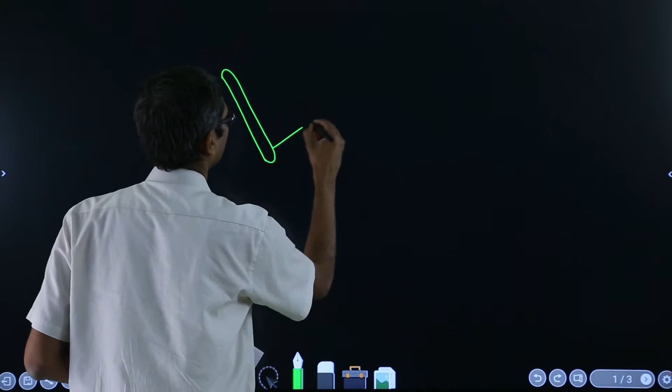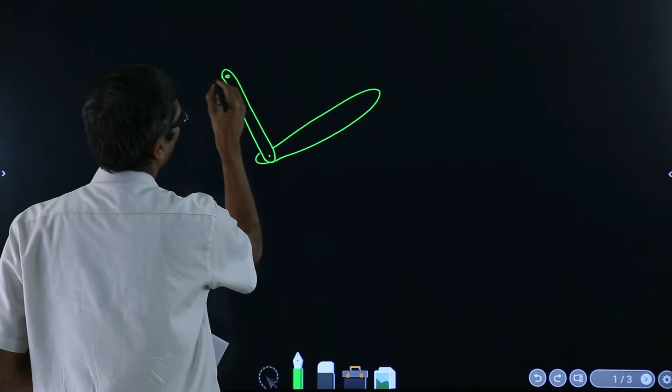Just for an example, a very simple one, suppose I draw something like this. Suppose we connect two bars like that, okay. Or let me draw this. And now suppose at this point here, I will simply put it here, no props, I'll stop it here.

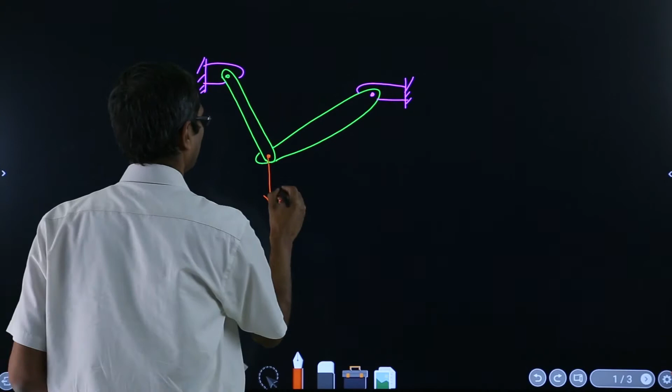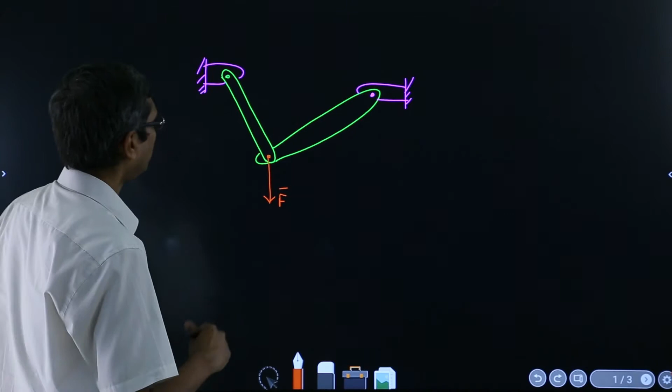And now I am applying some forces, say here. Right, now this is a simple, perhaps the simplest possible system where two bodies are connected. Now whether there are two bodies or three bodies is actually a point of discussion, and then we will proceed further. Here, this is body 1, this is body 2, but then what about these two?

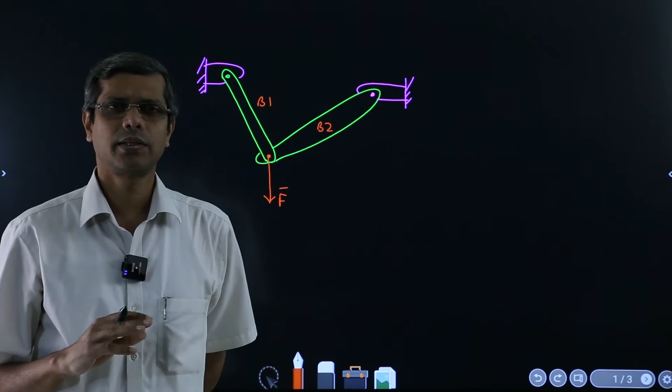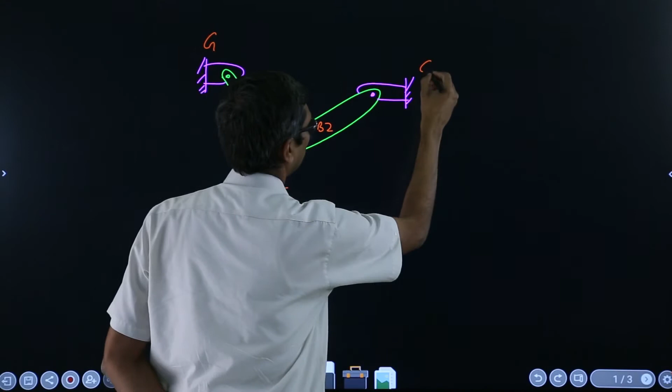Now the way I have drawn it, I have made both of them belong to the ground. So we can just say it's ground G, and this is also ground G. Now if we consider ground also to be one of the bodies, then there are three bodies in all, and if we don't consider ground to be a body, it's up to you how you try to write the further equations.

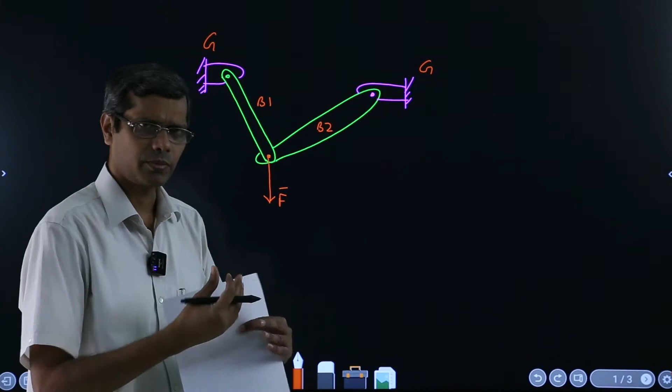Generally it is not necessary to consider the ground to be a body, but if you don't, then there are two bodies connected with each other by a pin joint, which is flexible, and these two green bodies are free to rotate about this point of connection. But then as a whole, the body cannot actually move.

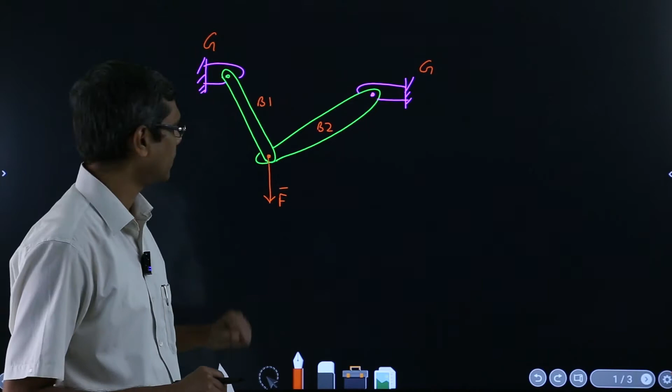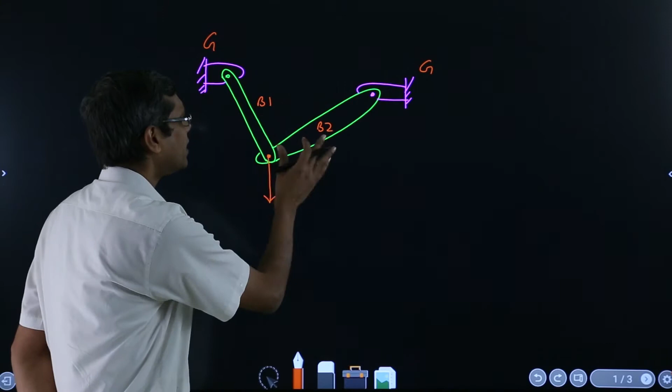In a way, the thing is, if I remove this joint, definitely they cannot move, because this point is fixed here. So this triangular section is behaving like a rigid one, and there will be no relative motion between this bar and this bar.

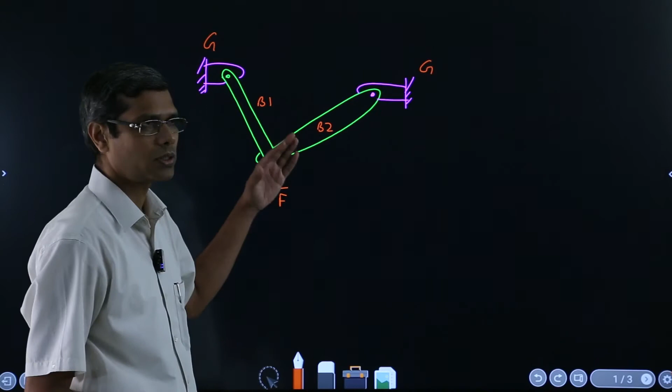Under such conditions, precisely these types of situations are what our discussion will happen around. That means they behave like a structure.

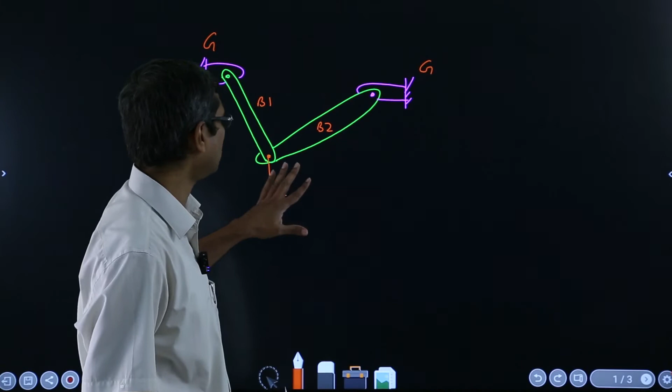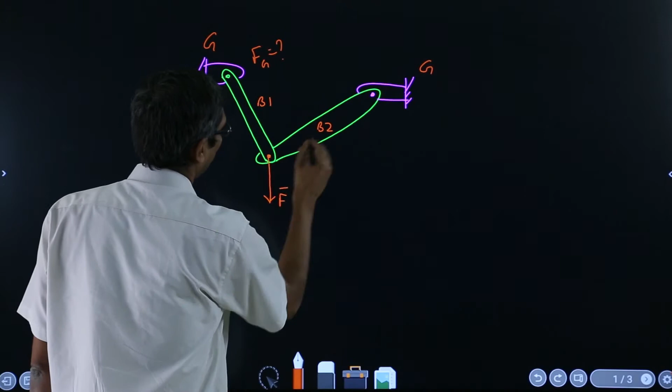Now when such things happen, our job will be to investigate what force is acting at this joint, the force on the ground maybe. Similarly, what force is coming on B2. So these are the types of questions we try to answer in this equilibrium of connected body forces.

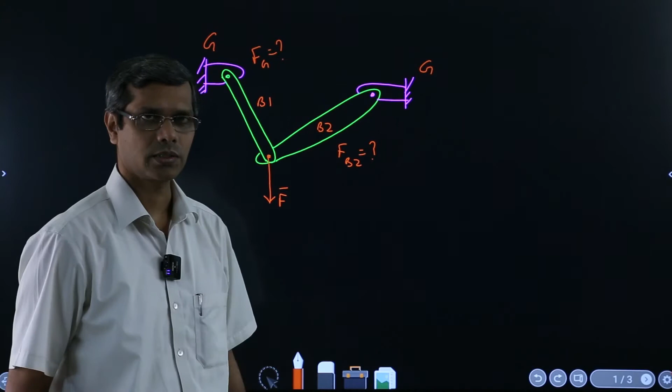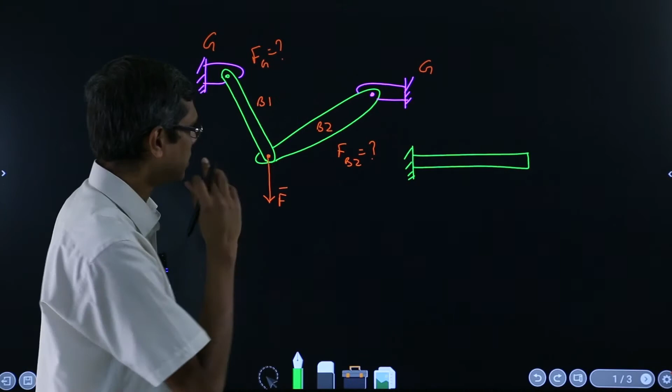Now if I apply force F, what are the ground reactions, and will there be any movement. For example, another simple drawing if I make, suppose I have a—because I mentioned movement, we will discuss this in great detail later, why and why not movement will be there under particular conditions—but just from intuition, we can say something like this.

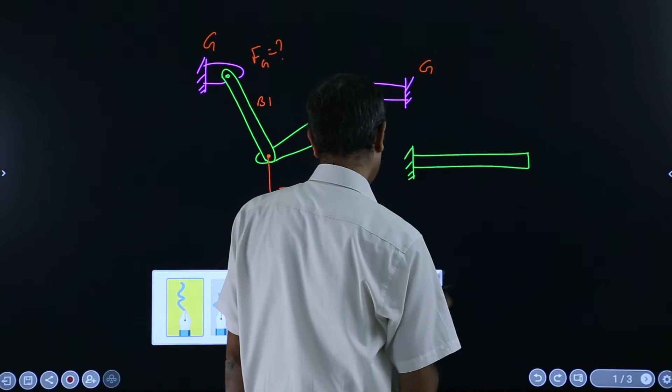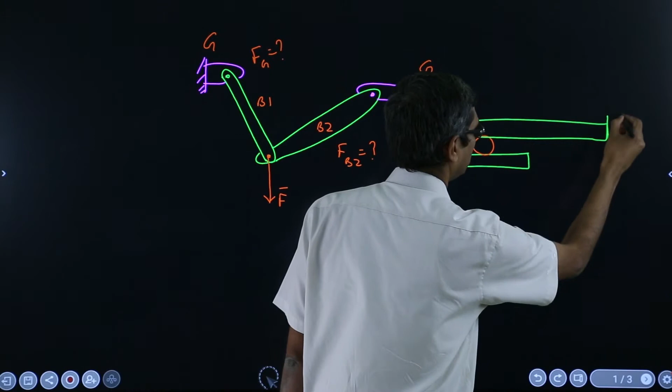Now suppose this is a beam, and here you put a roller, and then you have another beam like that. This is just a hypothetical situation, okay, and then I apply forces. So here I apply force.

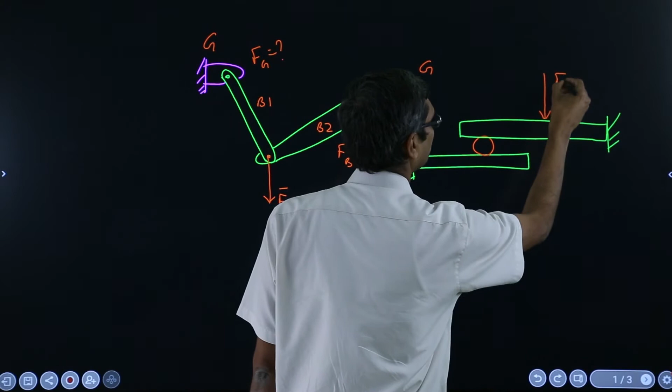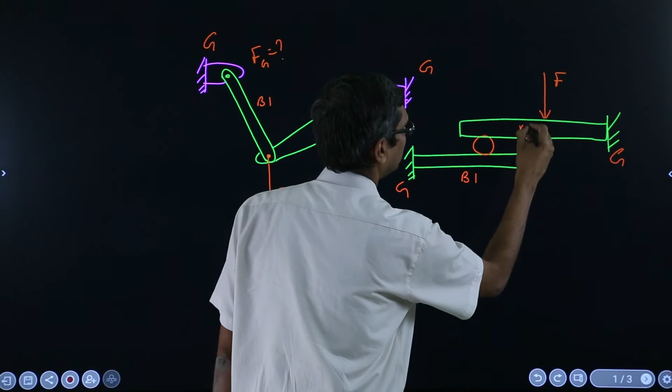So let me again say, this is ground, a single body. This beam is body 1, this is body 2, and what about this? This is a sort of roller sitting, or a cylindrical block you can think of, so that is just sitting there to connect these two bodies.

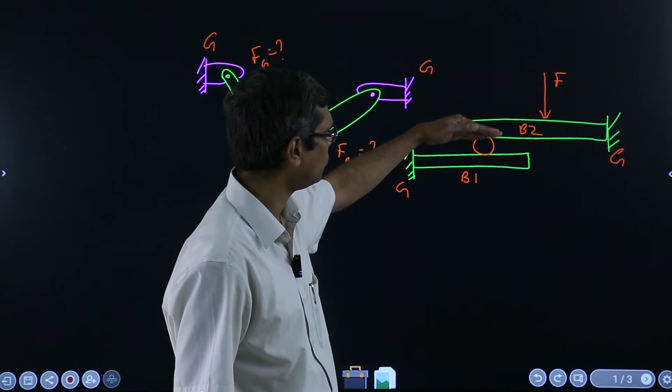So the force that comes from this beam will try to bend, and then that force, when it tries to bend, will be transmitted through this roller or cylinder to this block. Now under such conditions, what type of forces gets transmitted through what type of joints?

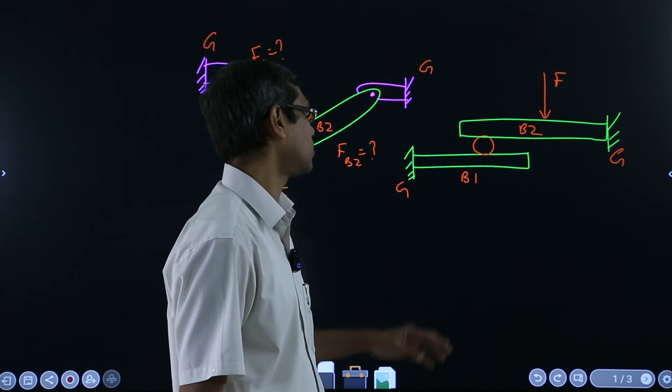So here this can be considered to be a body, or you think that, oh no, this is just a connector and I will just replace that by the force that it transmits, but I will not consider that as a separate body. So many such things can happen.

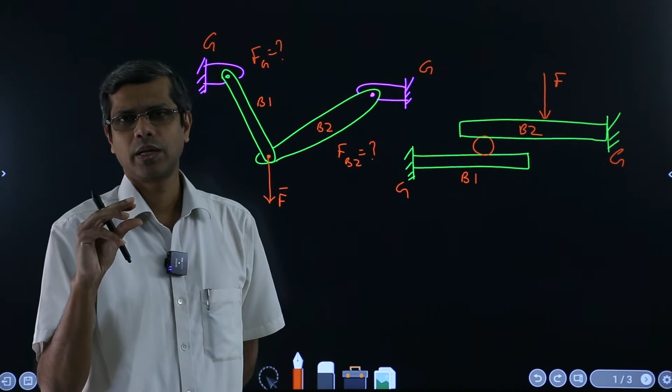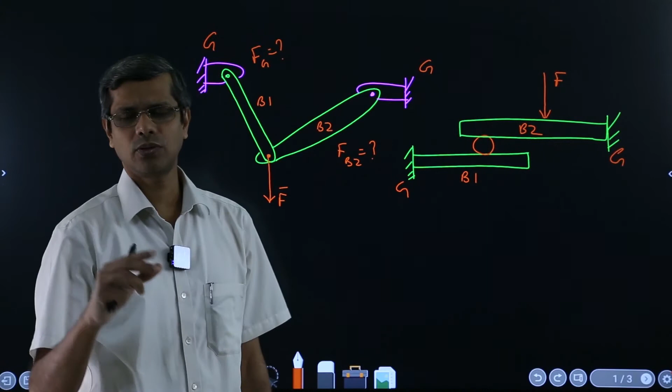For example, in some case this joint could actually be a small bearing. Now the bearing itself contains n number of elements, but then for simplicity or depending on the requirement, we may not even consider those smaller elements inside the ball bearing to be objects.

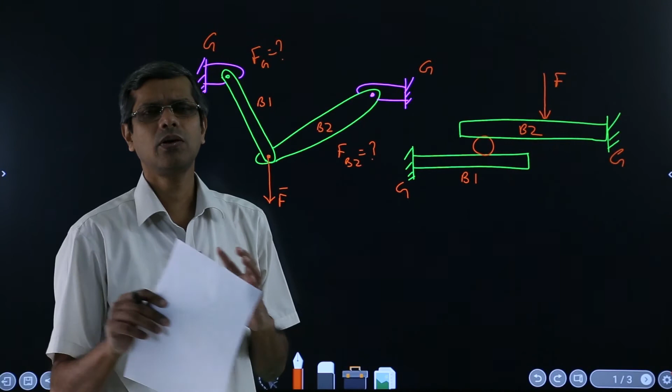For us it is just a pin about which both these objects rotate with respect to each other, the ground and this body. So depending on the context, we have to talk about how many bodies are there in the system and what are the connections between them.

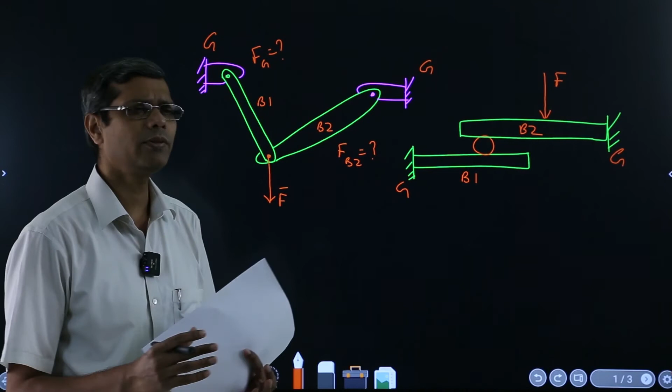That plays a major role while analyzing problems of equilibrium when multiple bodies are connected. From there the concept of free body diagram will come, so we will detach bodies from the assembly and show them separately, which we call free bodies, showing the forces coming from other bodies they were connected to.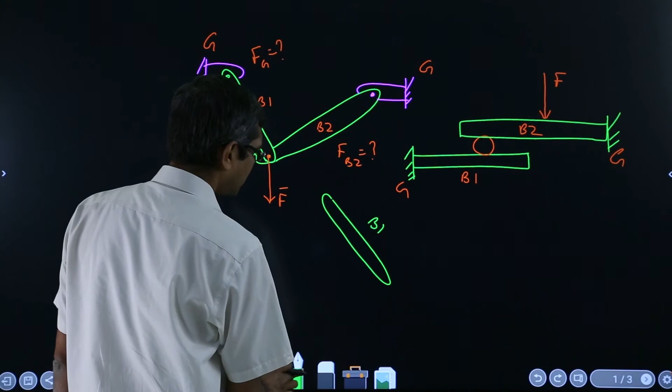For example, in this case, if I have to draw a free body, it would look something like this. So this is B1, and maybe I'll show that a force like this comes from that segment, a force like this comes from that segment, or whatever.

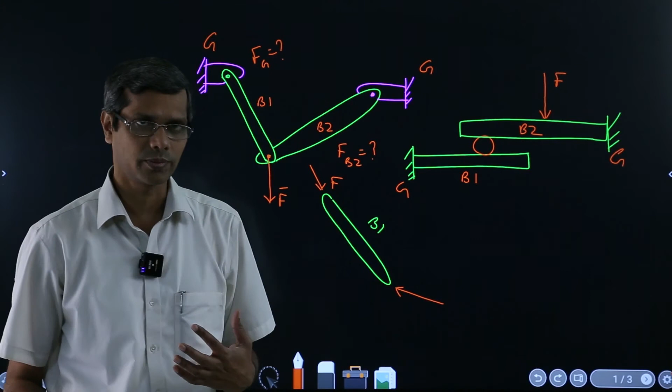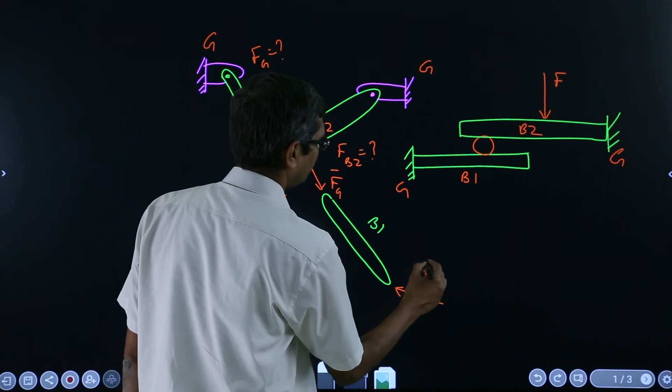I am not getting into the details of whether these are possible or not possible. I am just saying that you will have to show some forces, say this force is from B2 and this force is from the ground. There is no other connection to that body, so by default we will show this as an isolated system.

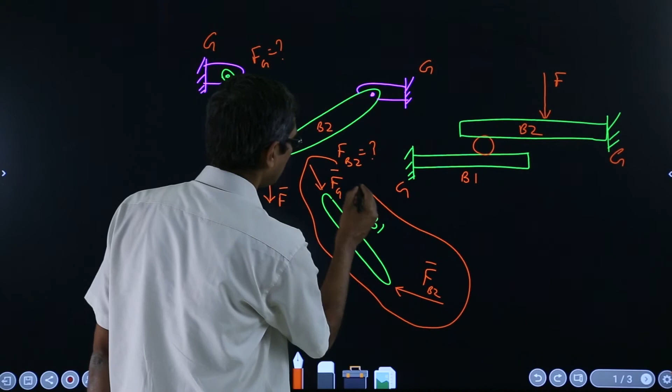This boils down to the cases which we had discussed in the previous segment, where this was a single body under the influence of many forces, and then we will investigate depending on the situation.

Which forces are known, which are not known, can they be evaluated using the equations of equilibrium, and similarly, once evaluated we will go to the next body or its free body diagram, which can be solved again like this. So that's how the process will be carried out for all the bodies, and we will have a clear picture about the full system.

So that's the whole story. But then we will make small segments now.

One will be, in any such problem, the major difficulty students face is understanding these contacts, meaning the connections between the bodies, because there will be many kinds of contacts, and to draw the free body of such systems you will need to understand how a particular connection behaves.

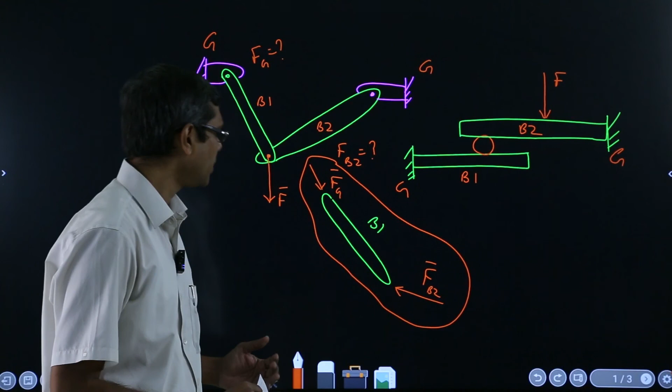Unless you understand the connection properties, you won't be able to draw a free body properly. So that is why, after this segment, we will discuss different types of connections, and then using those connection properties, how to draw free bodies. That is one of the major topics we will discuss in the next segment.